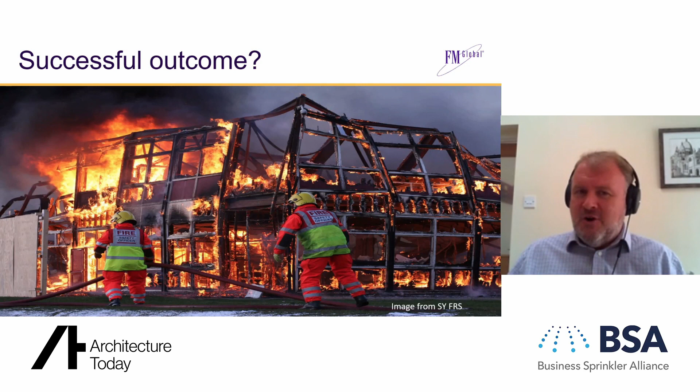The thing we need to be clear about is people often refer to regulations in this respect. And at this point I've got to really stress, in terms of outcome, regulations set the floor. They're the minimum. Despite what people may think, you can't limbo under them. This is the minimum. But that does not mean you're going to get all the outcomes you want just by following the regulations. Often when I talk about clarity of outcome, what I'm really trying to say is be clear what you want from a building. Don't assume just because you're following the regulations, you're going to get the right outcome.

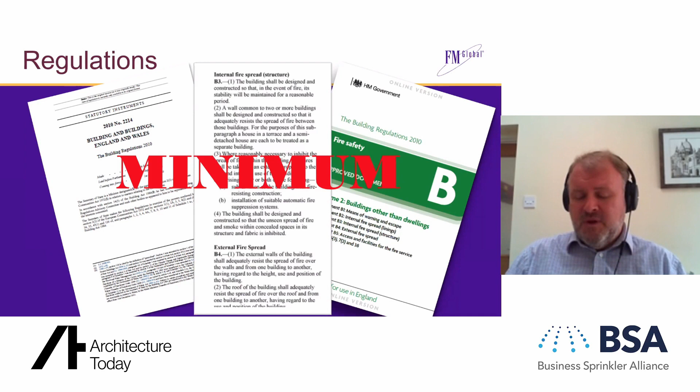It's something you need to share with the designer and others doing that work for you. I'm somebody who travels into London a lot, and I always see this sign, and it always reminds me of this: there's a gap. There's a gap between what people think is the outcome delivered by regulations and perhaps what they want. So if you want your building to be resilient to fire, you want the business continuity, you want to be able to use the building tomorrow, you've probably got to ask for different outcomes than regulations deliver. So be clear on the outcome you want from a building in terms of a fire.

Then there are many solutions. I'm an engineer working in the insurance industry. I help clients with all types of solutions for fire and natural hazard type issues, from materials to put on buildings that will limit fire spread or won't burn, through to strategies you need to employ to keep your building safe, through to a simple device like a sprinkler system, which is a fantastic solution in terms of minimizing the impact of fire.

As I said, I'm a child of the 80s, and there's one thing that keeps coming back. Whatever the solution you choose, you've got to be clear: does it work? Will it do what I want? Will it give me the outcome that I'm seeking? And that's wrapped up into these words: trust but verify.

What do I really mean? Well, for any of you who've watched parts of the Grenfell inquiry, or have been subject to some of these discussions about remediation of buildings, one of the things that may have struck you is how everybody's trusted that somebody will do the right thing. It's somebody else's responsibility. Somebody else will take care of that.

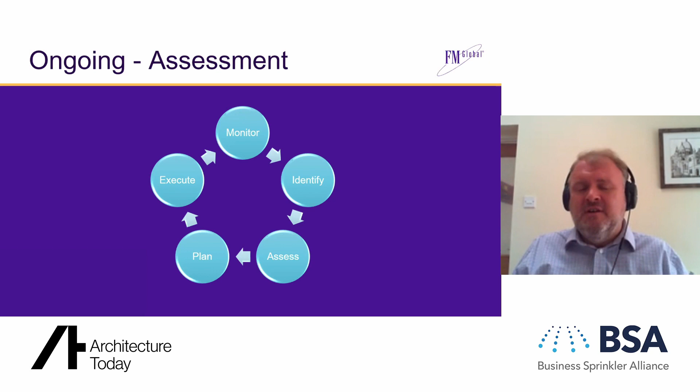That ongoing assessment is something that keeps us in the right place. It means we're no longer resting on our laurels. We're checking to make sure we're going to get what we expected. And in the world of fire, when we think about the lifespan of a building, ongoing assessment to check nothing's really changed—that the hazard hasn't increased, the risks haven't increased—is very, very important.

So I fall back onto my just five things: that element of who, ranging from responsibility to competence. That clarity on outcome—be clear, do you want to meet the minimums or is it something beyond that? That Glasnost-era phrase, trust but verify. I know it doesn't sound like a great way to form partnerships, but I think everybody understands there's a need for that verification. That's the surety that I've done my job, I'm getting what I want. And at the same time, it's a legitimate challenge. In the engineering world, that level of third-party scrutiny is the norm.

And remember, things change. If you remember the Billy Connolly business plan, I won't say it all, but stay awake—it's all going to change tomorrow. And the built environment is very much like that. That's why we need ongoing assessment to ensure we're in the right place, so whatever solutions we choose, we know we're building from a solid base. And that's really what we need to achieve when we're talking about designing for fire. I think it's about just those five things. Thank you very much for your time.

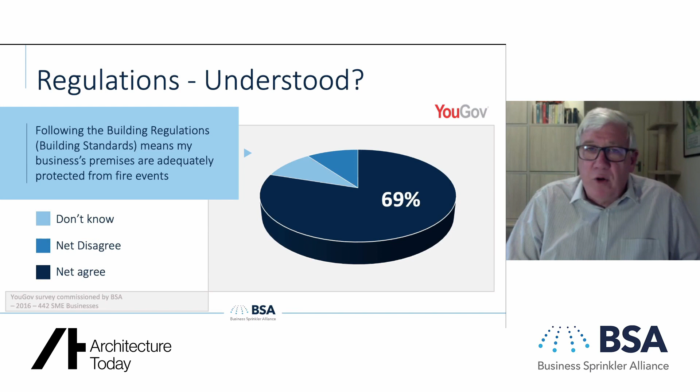So the Building Safety Bill, the draft of which is out, as we all know at the moment. But there's a point here I'd like to pick up that not everybody picks up on immediately. It says that the regulator, which was yet to be appointed, will oversee the safety and performance of all buildings, not just the higher risk ones that they'll concentrate on.

And the other thing they say is that it's for the safety of people having resort to that building, but also to the standard of the building as well. So the standard of buildings in general is under the remit of the regulator, although clearly they will have a focus on the higher risk buildings.

It's a draft bill out for consultation, so it may well change, but there are various aspects I'd like to pick out. Section 39 focuses on industry competence, and there's a committee for industry competence under Section 10. So there's a whole framework to ensure that competence in the building industry is increased.

Enforcement under Section 42 is also mentioned, and particularly two important points. One is that the regulator will have the power to give stop and compliance notices. Stop notices, in my view, are very powerful. Nothing focuses a developer's mind or a builder's mind more than the fact that some official can come in and say, stop all work. If that were to happen, that has an immediate and profound effect. Therefore, they will try their best to avoid that happening. So this, in my view, is a very good incentive.

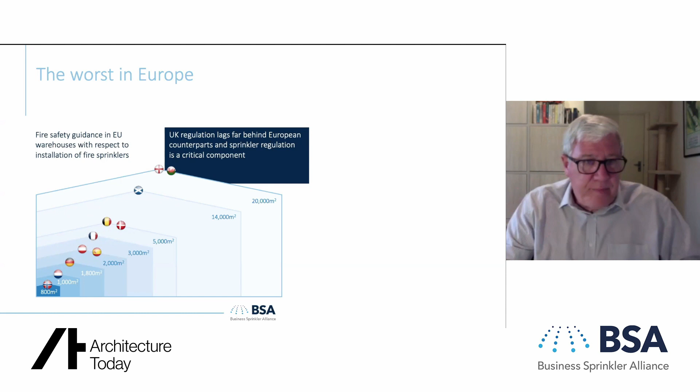One key point I'd make is that when you fit sprinklers, you must also have a sound building. A lot of people think sprinkler advocates like myself just want sprinklers everywhere and don't care what else happens - this isn't the case. You need sound buildings, which is where I think the Building Safety Bill, or Act as it will become, will pave the way. You can see from the purpose group lifted from Approved Document B that storage size is 20,000 square metres in England and Wales, or greater than 18 metres.

The point I'd like to make is that I believe those purpose groups are out of date. If you look at modern industrial buildings, they're multifunctional - whether it's an Ocado warehouse or an Amazon fulfilment centre, you've got elements of both warehouses and factories and industrial units in general. It's very rare now that you have a pure warehouse or a pure factory. I'd advocate that we should be including storage 7A with 6, industrial single-storey or indeed multi-storey.

The other problem is with mezzanine floors and such like. Indeed, in the recent Sony judgment, the judge actually said you should be including mezzanine floors in the size area - a common sense approach that we've taken in fire safety for many years, but now it's almost enshrined in law because of that judgment.

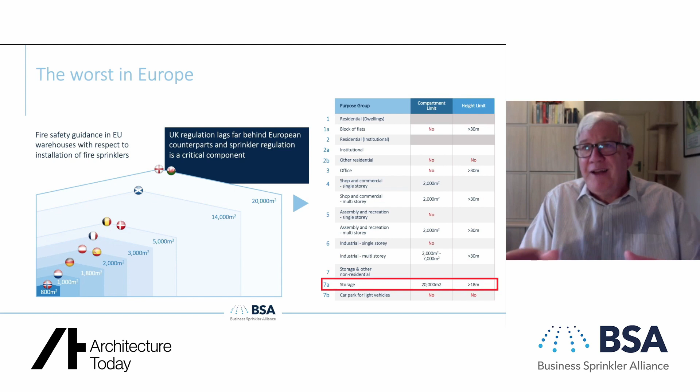So moving on, we also have some anomalies. There are several of them, but just to highlight the sort of thing: if you have a 30-metre block of flats, you have to sprinkler it. If you have a 30-metre hotel or student accommodation, you don't. They could be identical - actually, I should have used the same picture, I would have made the point even better. But the one would require sprinklering and the other two wouldn't.

In my view, if you live in a flat, you tend to know it better than if you're staying in a hotel you haven't been in before, or indeed in student accommodation. I'm not sure student accommodation is inherently more safe than flats. We would say they should all be treated the same.

Another misconception we'd like to shine some light on is that fire is under control. Here are some figures from the Fire and Rescue Services, where damage was recorded - it could be 1 metre to thousands of metres of fire damage. Rounding the figures up, you're talking about 1,000 industrial fires a year, 120 odd recycling centre fires, 250 odd warehouse and bulk storage fires, and 400 odd office and call centre fires. So industrial and commercial properties do burn down, or are affected by fire, and in many cases burn down completely.

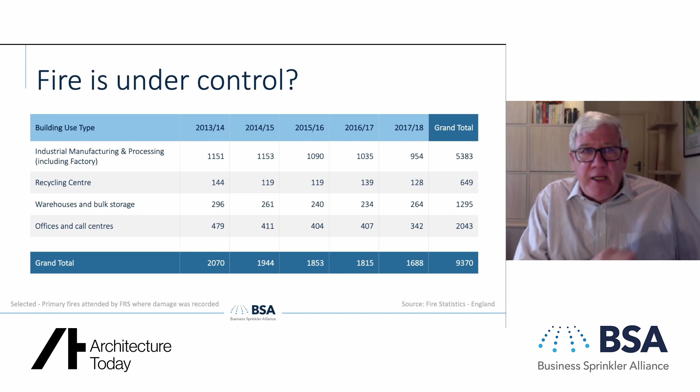This is to fight against the understanding that fire doesn't happen, or a subset of that belief - it won't happen to us. It does happen, and it may well happen to you. It's not as common as it used to be, which is a good thing, but there is still quite a proportion of fires happening in industrial commercial buildings in this country.

That's why we're advocating sprinklers as a very useful control measure on those fires. From 5 years of Fire and Rescue Service data, we can show they operate reliably 94% of the time, and are effective 99% of the time. 95% of the time they involve five sprinklers or less, and indeed 65% involve one sprinkler only. This is a very, very effective tool.

It's more effective than the Fire and Rescue Service - I speak as an ex-firefighter - because it's there and ready to go. Yes, occasionally you get failures; when you dig into it, it's usually human error somewhere along the chain - wasn't properly specified, wasn't properly installed. That's very rare because of third-party certification, etc. But basically, people don't realise how good sprinklers are. My job with the BSA is to make that point again and again.

Just to round up, to show why fires are more prevalent than people think, here's a case study: the Daventry Industrial Park fire, Garden supplies, 38,000 square metres - almost twice the size it should have been sprinklered at, 20,000 square metres. There's a whole story behind why it wasn't, I won't go into it here, but it's indicative that this often happens. We build bigger than we should, and without sprinklers.

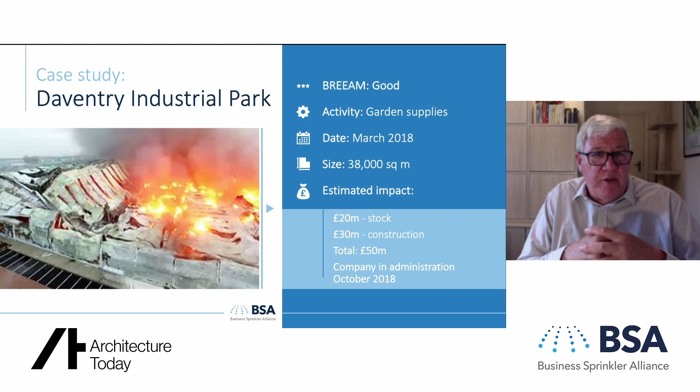Despite the fact it was a BREEAM-good, 3-star BREEAM property - environmentally it was very good - any environmental savings literally went up in smoke. It was wrecked. The rebuild cost - I don't think it was rebuilt - so you lost the economy and the jobs to the local area, but somewhere they'll have to stock this material again. And if you rebuild that property, you've lost any environmental savings you made in the first place completely.

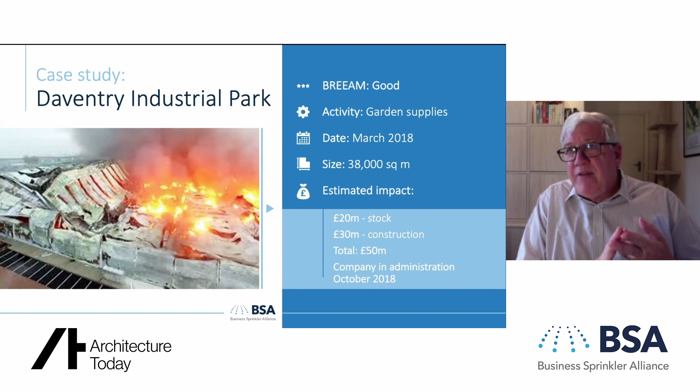So I hope that's just one case example - there are many, many more on our website. I hope in 10 minutes or so I've wrapped up why, as an ex-fire officer and chair of the Business Sprinkler Alliance, I think we're underestimating fire. We're not looking at the complexity of the buildings we're putting up, especially industrial commercial buildings, and we need to future-proof buildings for the country's benefit. If you lose a building, even if nobody dies, I don't think you should call that a success.

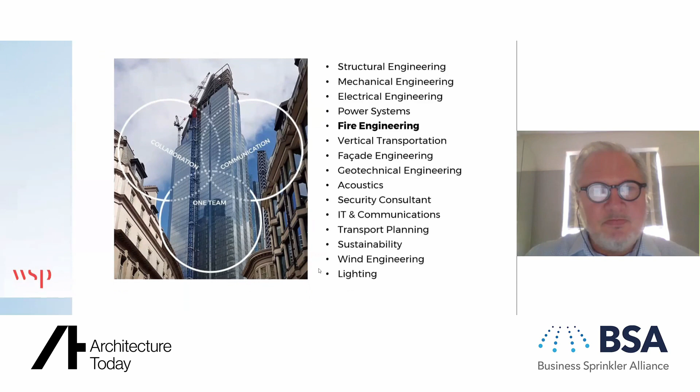In terms of fire, the way I like to describe designing for fire is to talk about how fires develop. Generally fires start with something that ignites something in the building, and it will start quite small. But if that fire is left unchecked, more and more combustibles in the building can start to contribute to that fire.

In terms of the atmosphere temperature in a compartment and how it varies with time, it will start to grow. You reach a phase where the atmosphere temperature, particularly at the top of the compartment, gets to a level where the radiant heat flux generated will start to involve more and more combustibles in the compartment. You'll reach an almost runaway phase, the term flashover, denoted by a very rapid rise in temperature as the fire takes hold.

Eventually the fire in the compartment comes into equilibrium with the ventilation and thermal inertia in the compartment, and you get the fully developed phase of the fire, where all the contents are burning but it's controlled by the oxygen coming into the compartment. Typically the atmosphere temperature would peak around 1100 to 1200 degrees C, depending on what's actually in that compartment. But eventually all the combustibles will burn out, and then the fire will start to decay in temperature and eventually go out if left unchecked.

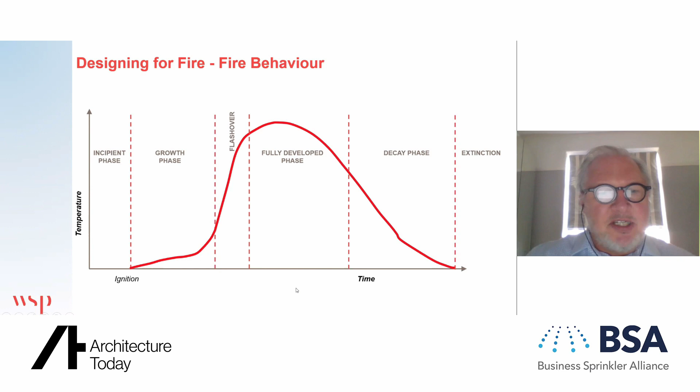I like to start with that just to let people know there's a time element in terms of how fire protection systems, used to mitigate the effects of a large fire, can actually act in a building. If we use that fire development as a timeline, then in terms of an overall fire strategy, it's best to detect the fire when it's small in size and lower in temperature.

One way of doing that is to put in a suppression system, which will cool down the fire and control its development, or even put it out when it's quite small. From a fire strategy point of view, this is quite an effective measure.

The thing that really harms people in terms of the impact of fire on a building and its occupants is smoke and toxic gases. So we need some kind of smoke control system to ensure it's controlled so that people can safely escape the building, and protected escape routes are a very important part of any fire strategy.

One other important part is compartmentation, and its effect is manifold, but it can be used to protect escape routes and make sure smoke is kept in the compartment of fire origin. More importantly, it tries to keep the fire in the compartment of origin and stop it spreading to other parts of the building.

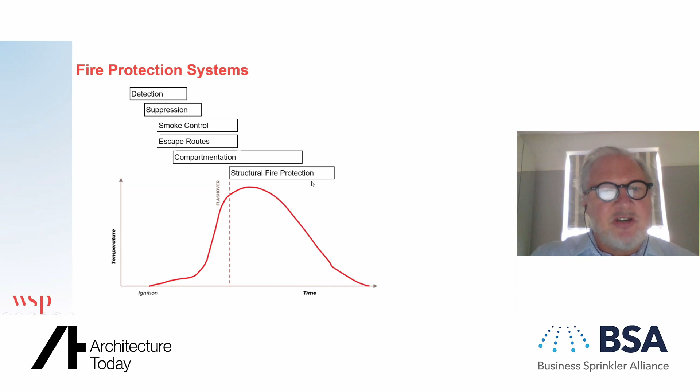And lastly, in terms of making sure a building is stable during a fire, structural fire protection can play an important part in any overall fire strategy, but really it only becomes important when we have a severe post-flashover fire in the first place. The point I'm trying to make with the timeline is that you're probably better off spending more money at the front end of the process, trying to stop the fire when it's small, rather than at the back end when you've had a systemic failure of the overall fire strategy to get a post-flashover fire in the first place.

In terms of the regulatory environment, most people are familiar with Approved Document B, which deals with the many different aspects of any fire engineering strategy: means of escape, internal fire spread on linings and structure, external fire spread to ensure fire cannot spread between buildings or up the building via facades, and lastly access and facilities for the fire service to enable an effective and safe route to tackle any fire. The rules in the approved document are mainly prescriptive, meaning they say you shall do this and you shall do that, and if you follow these rules you're deemed to satisfy the functional requirements of the building regulations, particularly Part B related to fire safety.

But there are alternatives, because it's recognised that it's quite difficult to write prescriptive rules applicable to every single building, and there will always be deviations needed to achieve the building's functionality. As a fire engineer, we have to develop alternative fire safety engineering approaches. As the approved document states, this may sometimes be the only practical way to achieve satisfactory fire safety, particularly in large and complex buildings. The main difference is that alternative fire engineering approaches concentrate on the actual performance of the building, rather than just doing something and assuming a certain performance will be achieved. That's the simplest way I can explain the whole fire engineering approach.

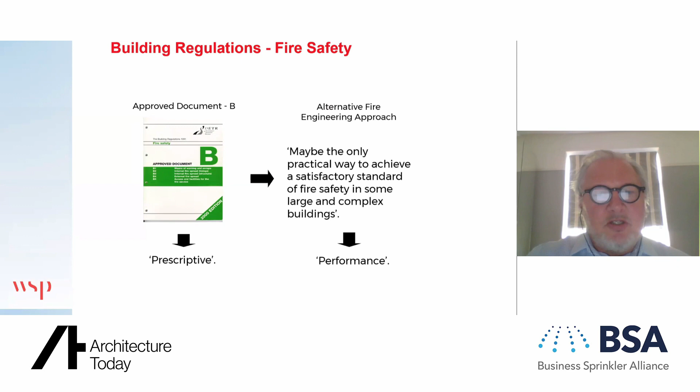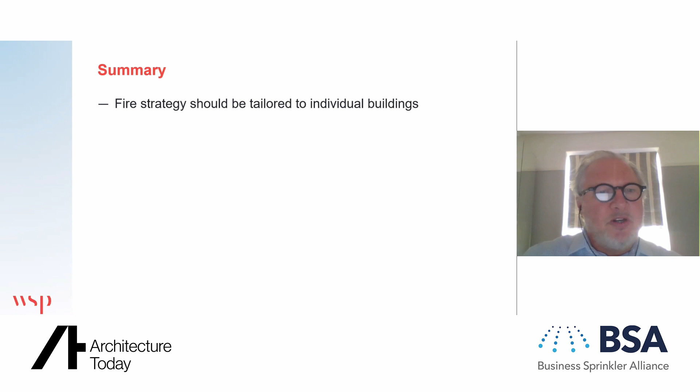So those are really the only points I want to make today. In summary, a fire strategy should be tailored to individual buildings - no two buildings are the same. The best fire strategy for a particular building needs to be developed with the rest of the design team to ensure it's effectively incorporated into the building design. Performance-based design enables us to achieve this.

It tends to result in more economical design compared to prescriptive approaches - not always, it depends on the design outcome desired by the particular client for that building. It's suitable for most buildings, not just complex ones, although it's mainly used for complex buildings in the UK. It gives us a much better understanding of the actual behaviour of the building during a potential fire, rather than just applying a series of prescriptive rules, and it can help identify the more critical aspects of the overall fire strategy we need to concentrate on for a good outcome.

The last point I'd like to make is that fire engineering as a discipline is not homogeneous. It requires input from many people with specialist understanding of different aspects of a fire strategy - for example, psychology and human factors for means of escape, chemical engineering for understanding how materials may participate in or react in a fire, as well as overall functionality of the building, and firefighter access, including knowledge of how firefighters operationally fight fires and making provision in the building to enable them to do that.

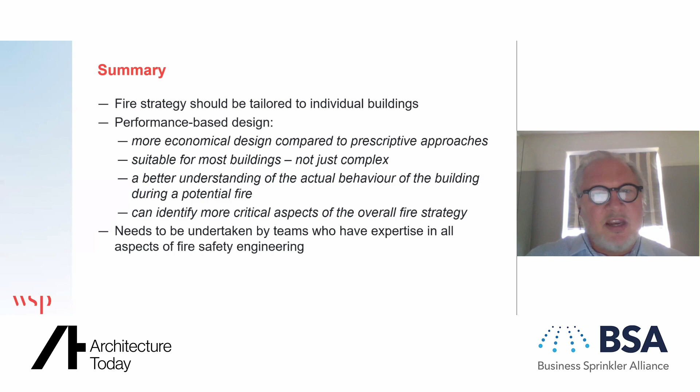Hello everybody, Paul Bussey here from the RIBA Expert Panel, talking about the construction industry and regulations pre and post Grenfell, but also, as reported to the government and the All-Party Parliamentary Group, a complex, creeping, collective short-sightedness or myopia.

Today I'm going to try and explain - I've been working in this field of architecture for some 45 years, the last 20 or so specialising in fire design and CDM, and I've been trying to make fire engineering solutions. And now I'm questioning that, to be frank.

If I look at any tower block or any housing block, I am now seeing disabled people, elderly, young, and other vulnerable people. Actually, there's no such thing as general needs housing these days, because of our social integration we're all in the same buildings. So we must deal with the most vulnerable first.

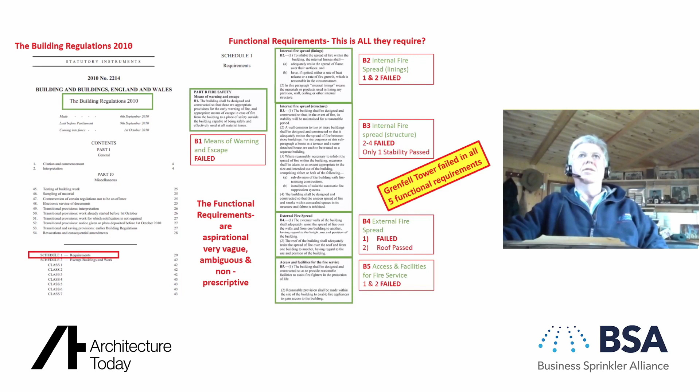If we look at our functional requirements in the regulations, 2010, there are 5 of them, on page 29. They're incredibly aspirational but very vague, ambiguous, and non-prescriptive. So even though the Grenfell inquiry has suggested we failed the external fire spread, B4(1), we also failed in all other respects, and I'll try and demonstrate that to you.

The approved documents, which everyone believes actually meet the building regulations, it's quite interesting to find that they're not mandatory. Even though it said, at the time of Grenfell - this is pre-2017 - that the fire safety requirements of the building regulations should be satisfied by following the relevant guidance in this approved document, it's very clear they don't. There's all sorts of other regulations, guidance, legislation or quasi-legislation which seems to back this up.

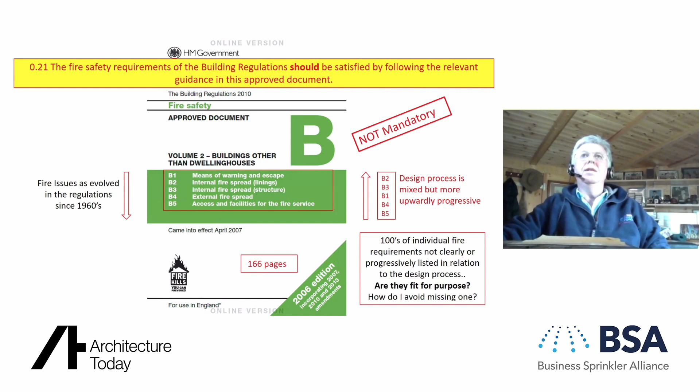Now this is an incredibly difficult situation as a designer. If you have an approved document with all this criteria in it, B1 to B5, which are actually in a very non-intuitive design direction - 1 to 5 on the right-hand side, actually 5, 4, 1, 3, 2 makes a lot more sense - and there's also hundreds of individual requirements within that document. So is the ADB fit for purpose? That's my question.

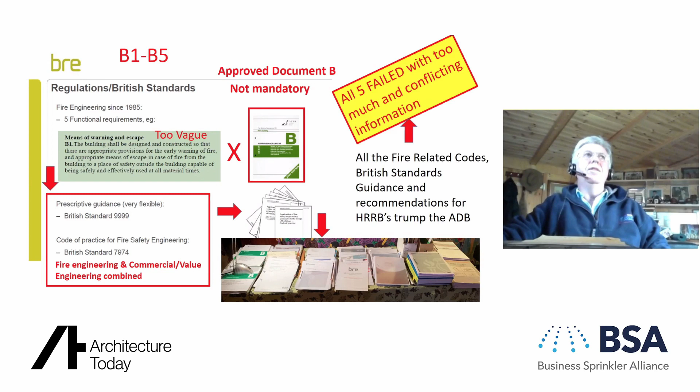That photograph bottom right shows all the different bits of legislation and guidance that I have in my office here, that I have to plow through to design any building. The green box top left is the means of warning and escape functional requirement, which is incredibly vague and aspirational. In between that, we've got an approved document, which is not mandatory. How on earth can you work your way through all this conflicting and confusing material - often conflicting, often confusing, arguably very clear to lawyers, but frankly not to most of us.

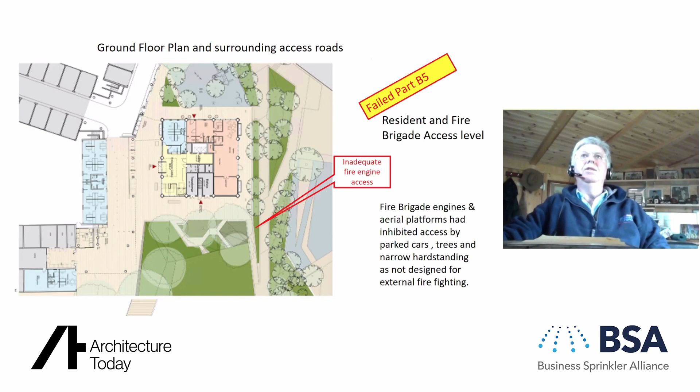So when we look at Grenfell itself, we have a tower block in a green landscape, but actually fire brigade access was inadequate - albeit they were fighting the fire from a firefighting shaft - fire tenders and aerial appliances still had to get near the building and couldn't because of landscaping, parked cars, and other features. So we failed part B5.

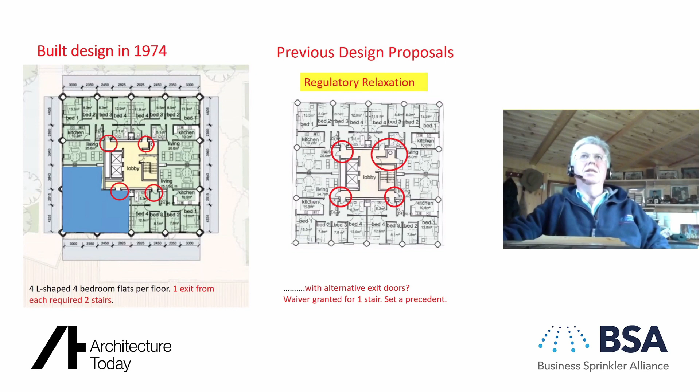When we look at the building itself, originally there was a previous design proposal showing alternative means of escape from each flat. The blue on the left-hand drawing shows the flat sizes, 4 of them originally, and you would escape on the right-hand side through 2 escape doors into exactly the same yellow lobby area. That's not an alternative means of escape in my mind, and certainly at the time it seemed to be a way of achieving a waiver for 1 staircase - get rid of that other staircase, we don't need it, it's got an alternative means of escape.

Now we look at what was finally built. We actually have 6 flats per floor, all with 1 escape door - that alternative means of escape was lost. On the left-hand side we've got these 1-bedroom and 2-bedroom flats, just 1 door out, 1 staircase, 24 storeys. Is that an alternative means of escape? So the regulations were being relaxed at the time.

Also, in this 1 staircase, going from top to bottom, we've got a locked gate at the roof which prevented people getting out - whether that would have helped them or not is another matter. Then there's gas pipes in that staircase, which apparently when they were turned off, the flames reduced. The old fire lift was not working on the day. There's no wet riser, which was required at 60 metres. There was obviously the 1 staircase waiver. There was no sprinklers at 30 metres, and above 100 foot that was required at the time Grenfell was originally built. So these things were relaxed massively over the years.

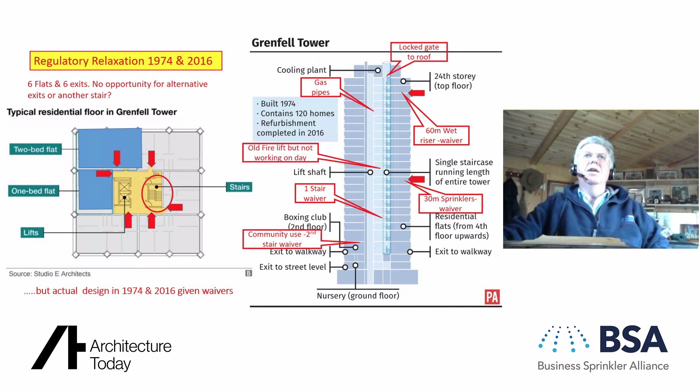And then there's community use down at these lower levels, which would have required alternative means of escape. So historically, things have gone wrong.

Looking at the external walls and this famous diagram - I'm not going to go into the detail - but the red box on the left-hand side shows an 18-metre high, above-18-metre cladding issue, and it's very clearly stated Class 0 surface spread of flame was acceptable, but the building regs, according to Sir Martin Moore-Bick, supposedly failed.

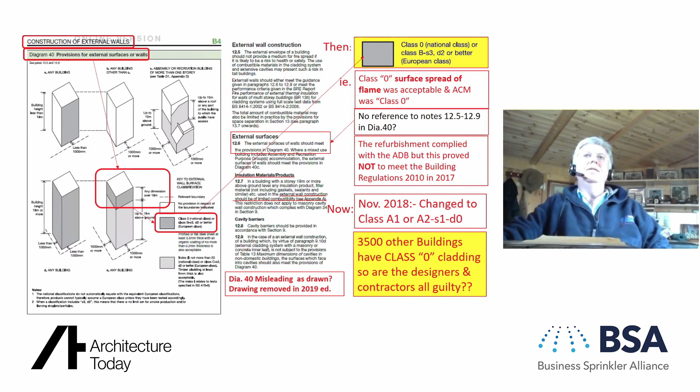But the approved document said it was okay. So there's now, we think, although the statistics vary, some 3,500 buildings with this Class 0 surface spread of flame cladding. Are all the designers and contractors guilty as a consequence? That's a question for everybody.

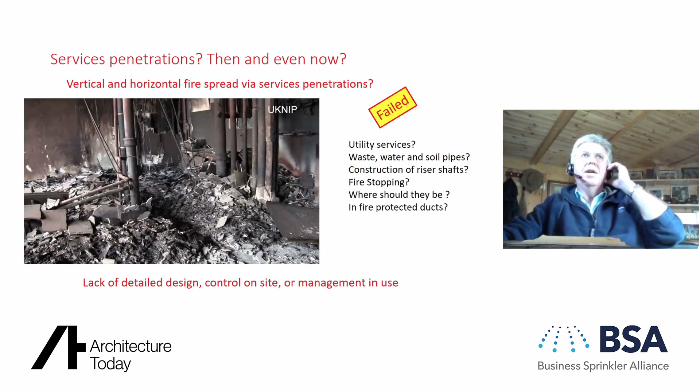Service penetrations throughout the building all failed, so internal fire spread and compartmentation was completely ruined by these. We know the fire doors failed. The compartment walls might have been okay, but we're not totally sure because they had holes punctured through them for services, particularly gas pipes. And invariably there are raised floors and other voids in the building which cause all sorts of problems.

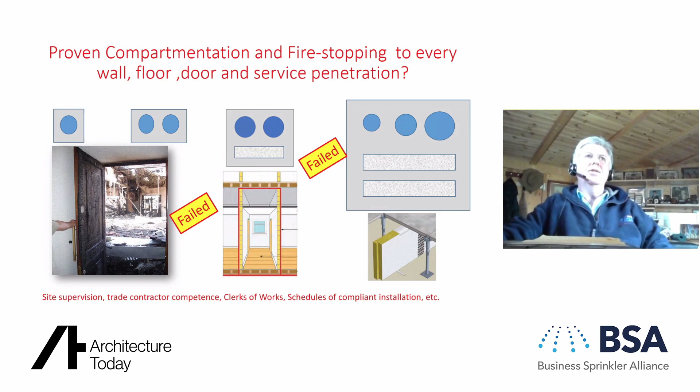So on the actual building site, it's necessary to have supervision from clerks of works.

We know the stay-put policy works 95 to 99% of the time, but Grenfell, Lakanal and various others have gone beyond that. So we know we have to deal with unusual circumstances. There needs to be a Plan B, an evacuation strategy, not just stay put.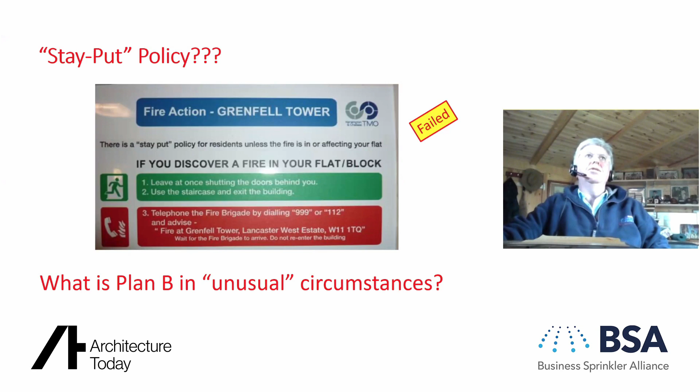We know that when the fire brigade gets into the building, they have to fight the fire from a bridgehead two floors below the fire floor. They then have to bring equipment, kit up, hoses, and attach to dry risers, and these hoses actually sit on the staircase. Thinking of people coming down the building while these guys are coming up, it suggests single staircase buildings are not designed to facilitate simultaneous evacuation.

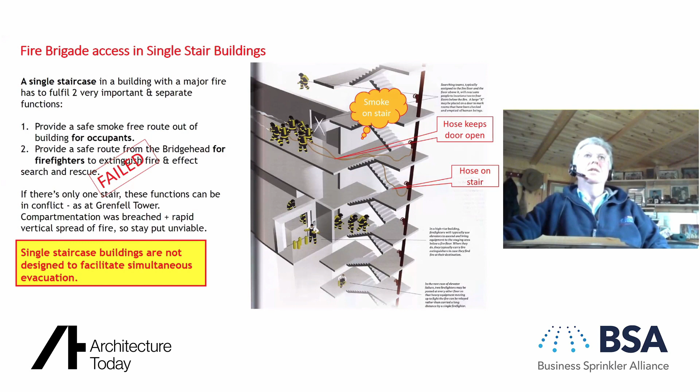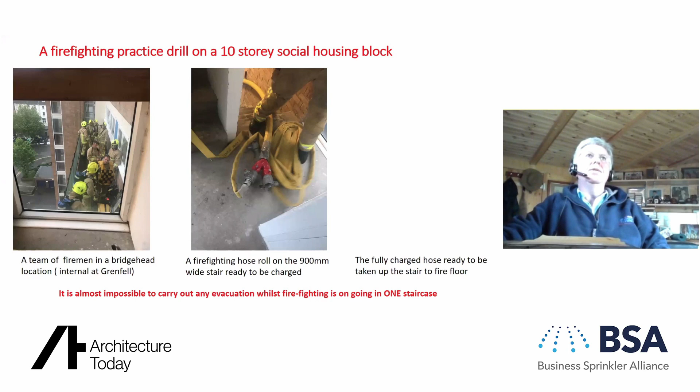A drill I visited at a project, a fire brigade drill in Brighton, showed firemen in a refuge area, albeit external on a balcony because the lobbies were too small. The hoses were rolled out on the staircase, and they looked like that once charged up. Now who can escape through that zone except for the very able and very ambulant? Not many other people, including myself. It was very difficult to work our way around those.

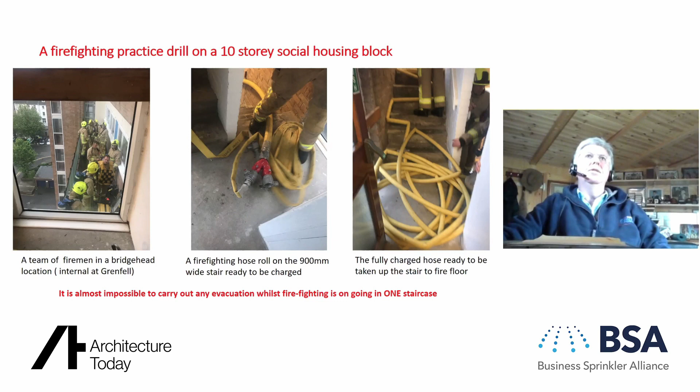So we go back to 1962, and we have fire legislation. The RIBA have gone back into history to see how this worked in the past, and we had a place of relative safety, which the building regulations or approved documents still certainly encourage. Protected lobbies, not just a corridor, no flat doors in that corridor, and this protects the firefighters and vulnerable people.

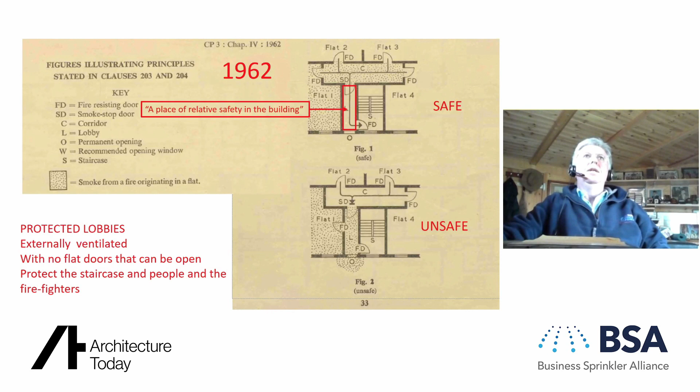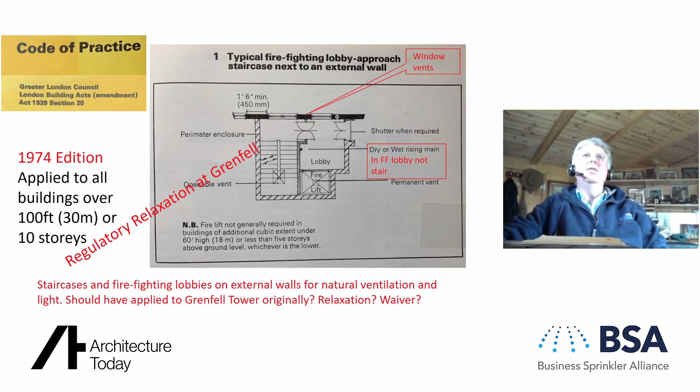Moving on into 1974, about the time Grenfell was originally built, there's actually a requirement for buildings over 100 foot to have sprinklers, plus a fire stair which is protected, ventilated, has an external window or at least ventilation at the top, and a firefighting lobby, which is also a vulnerable person's lobby. It has a fire lift, a dry riser in the lobby, so the doors aren't propped open. These have all been relaxed in the Grenfell situation.

So we come up to 2010, and we end up with these diagrams relating to small single-stair buildings or buildings with a common staircase. Now, every flat should have access to an alternative escape route. Well, how did that work? It wasn't available. Single staircase buildings, the top floor of the building is no more than 11 meters above ground with a single stair, and that was current. That is still in the current approved document.

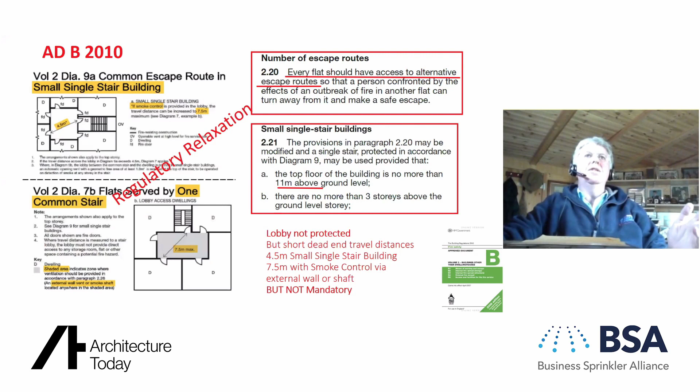Short dead-end travel distances, 4.5 to 7.5 meters. 7.5 is smoke control. At Grenfell, we know it's around 9 to 10 meters - not too far exceeding, but greater than the current regulations suggest.

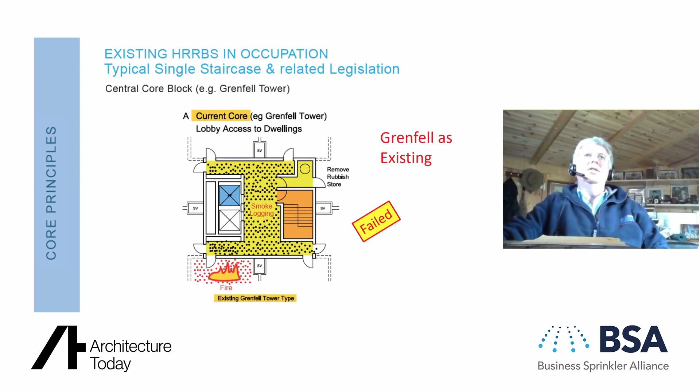So we end up with a core like this at Grenfell, full of smoke because the doors are left open, no door closers, or people have left them open because they want to escape back if they can't get into a staircase. They need an option to turn back. And this actually shows it did not work. It was not a compliant scheme.

So at the RIBA, we've come up with trying to, A, remediate Grenfell, or B, come up with a solution to deal with similar types of cores, with the green zone being this refuge area, firefighting lifts and disabled access lifts, a protected stair, and dry risers in the lobby, not in the staircase, propping doors open, affecting everybody else escaping.

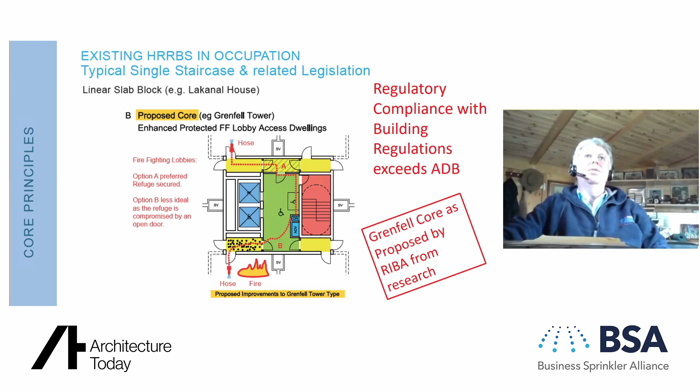So we know our industry cannot deliver fully compliant buildings in terms of structure or fire protection, and the Edinburgh Schools case demonstrates this. The diagram on the right shows how many defects are often found in major public buildings and other buildings under a design-build contract.

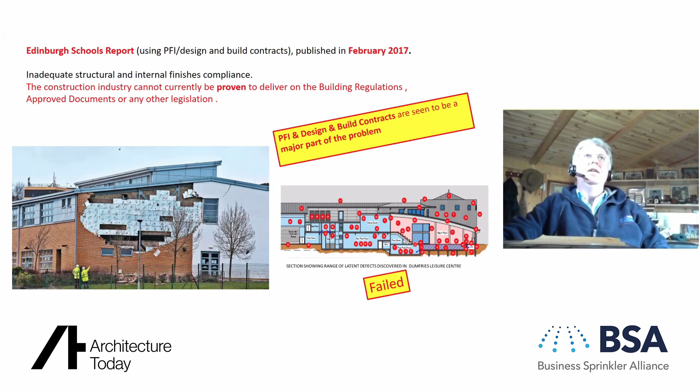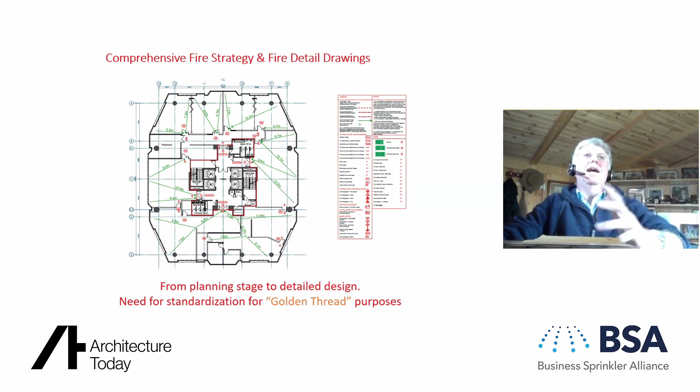So these contracts are seen as a major part of the problem—things failed on site with these. We need greater site supervision and better drawings that can actually help through the design stage, producing design information that's passed on to the contractor and built, then ultimately passed on to the client to manage and understand the building, so future people can modify it based on the existing fire strategy. We have specification information we're now trying to tag with red flags—mandatory items. We don't want these design value engineered out in the guise of fire engineering. Actually, it's cost cutting by another term.

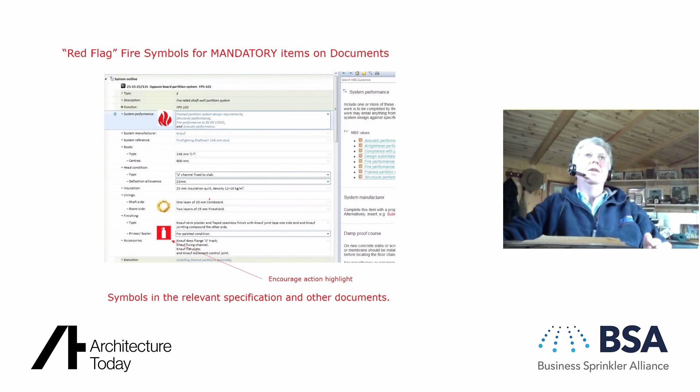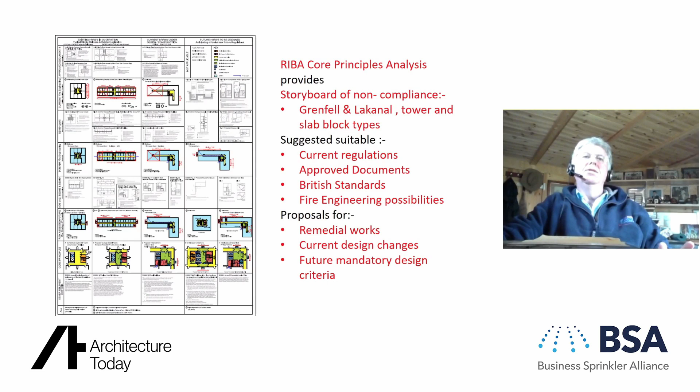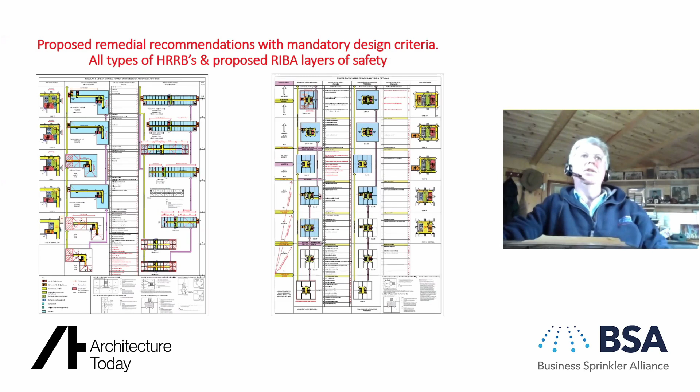At the RIBA, we've put together something that looks very complicated, but it's actually about understanding the current regulatory situation—how current regulations apply to existing buildings, buildings currently under design, and buildings in the future. We're putting together prescriptive but still reasonably flexible legislation and guidance to help everybody come up with better solutions. We then look at how this relates to individual buildings, analysing it in relation to Lakanal and Grenfell, finding how it currently works and how we'd rather it worked in the future. We've spent a lot of time researching the history of fire engineering, putting it into modern day practice, and coming up with solutions for all types of buildings.

So Grenfell failed for many reasons: fire engineering, design and construction complacency, incomprehensible legislation and the framework of the regulations, deregulation over the years, inappropriate materials and value engineering, management shortcomings, and contractual procurement misdirection.

Is design-build the best thing for producing a fire-safe building? Possibly, but it needs considerable modification. Maintenance inadequacies—we know the building was not maintained well, it had been refurbished, and we know the smoke extraction system failed. The fire lift failed.

Can we rely on mechanical means to increase travel distances or allow higher buildings? Question mark. Firefighter training inadequacies for total evacuation—the firemen did a heroic job, but the firefighting training was inadequate to help the total evacuation.

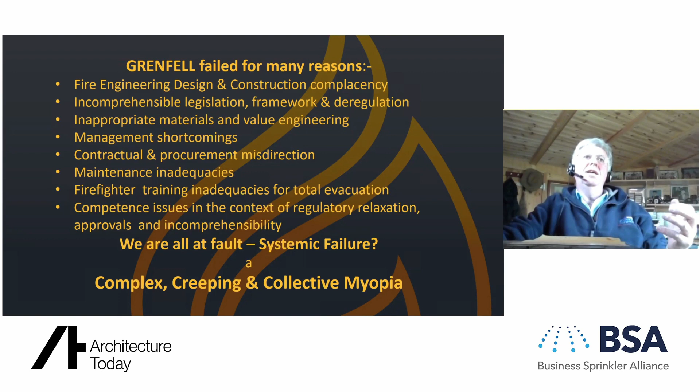And then competence issues across the whole spectrum. How can you, as a designer, actually work and supposedly be competent when the regulations are so ambiguous, so flexible, and often frankly incomprehensible? So I would suggest that the whole industry, as Dame Judith Hackitt suggested, is at fault. There's systemic failure here—this is complex, creeping, and collective myopia from everybody.